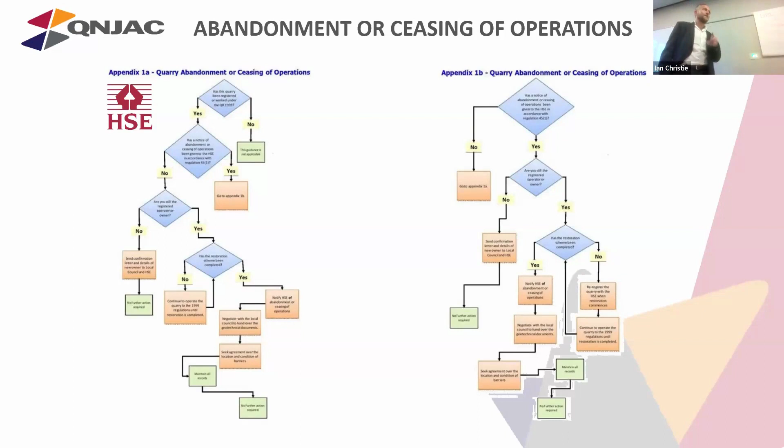So the next one here, blast designs, techniques to improve quarry face stability. What this piece of guidance was trying to do - and there's another piece that comes in later also - was to improve the connection and consultation between blast design and quarry design. This was a joint piece of guidance that came out with the Shot Firing Group, looking at the shot firing rules and how that integrated with the QDP.

It would be quite a natural question for someone to ask you - a geotechnical specialist or someone from the agency - to say, why do you have burden and spacing of X blast design? Just to come back and say well, we've always done it that way isn't the best kind of answer. It would be a case of, well, it's based upon the ground conditions, it's been refined and modified, taking account of the geology and other things like that.

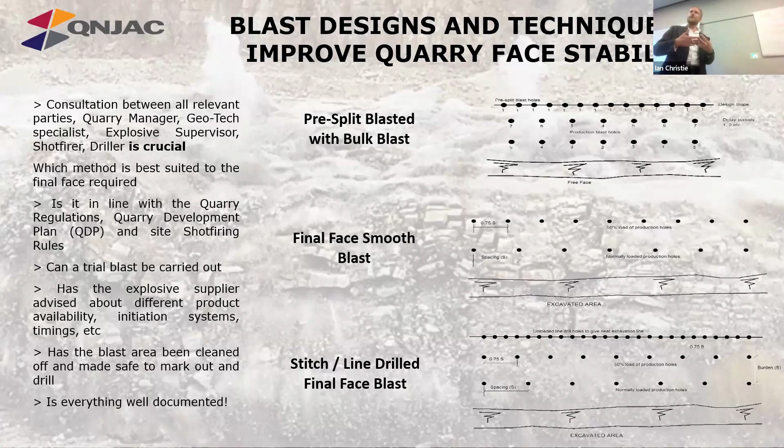If you've got scenarios like that on your sites where your design is saying one thing and the rules are saying something else, and then what's actually happening in practice in the quarry is different, that suggests a disconnect or communication issue. It's those kind of things that a quarries inspector or someone from your own safety team might look at and say, wait a minute, why aren't these things talking to each other? Are people really engaging with this?

But it's quite useful to have a graphical representation of this kind of stuff that you could share with operators in the vehicles. They could even have copies of these kind of things laminated in the vehicle with them, again modified to suit the specific scenario.

Geotechnics on one hand can be made to appear horrendously complex, and some of the analysis, some of the maths behind it, is no secret - but actually on the ground and day to day, this stuff doesn't have to be. So I do quite like these type of diagrams.

So yeah, toolbox talk with a geotechnical theme to it here. Good CPD even if you're not going to necessarily use them on sites - talking through. Does anyone use job cards on their sites? It's a well kind of way of communicating this stuff.

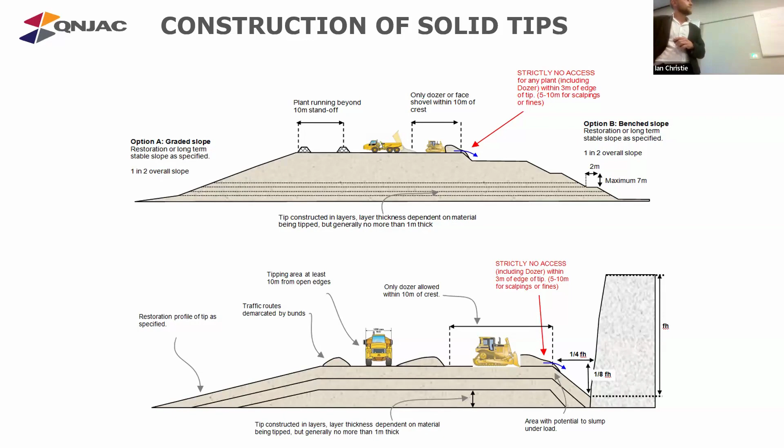Duties of the operator. This is useful, I think, in that if you have a new director, managing director, or operations manager come into a site who may not be familiar with the quarry regulations, you can't presume that people coming in always have that knowledge of the quarry regs. It's a good document - fairly clear, easy to read, but quite a thing to get to grips with.

Part 6 of the quarry regs is quite a chunk of that book. There is some guidance here - I think this could do with a bit of a refresh in terms of the look and feel of it. But there is something you could point that person towards and say, if you want to get familiar with the quarry regs and really understand why we're doing this on the site, have a look at this.

With a copy of the quarry regs in one hand, it will talk you through the duties of an operator - I suppose even who is the operator, who is signed up as the responsible competent person. That helps focus the mind if you're trying to promote certain safety issues or challenges or costs on site related to geotechnics.

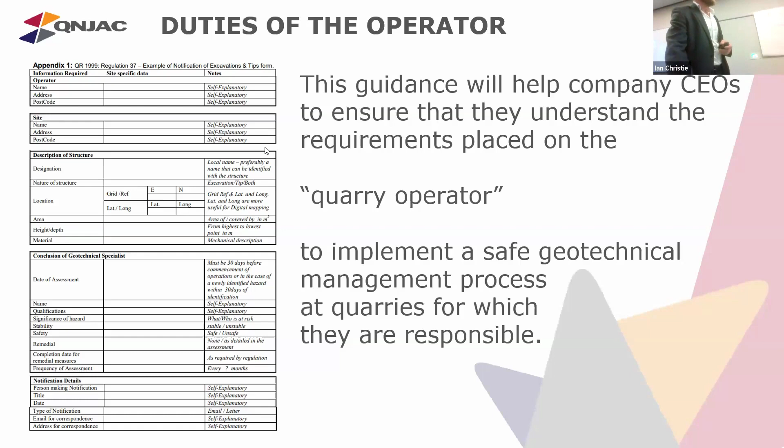Yeah, so this one, another piece on excavation and tip rules. Key document on the site for me. If you're doing anything on a quarry, one of the main things is digging the excavation and forming tips and stockpiles. And when it says tips, that includes stockpiles as well.

The little preamble on the front of this piece of guidance I just copied in here because this would apply to all the guidance that comes from QNJAC. It's been endorsed by QNJAC. Following this guidance is not compulsory. You are free to take other action. Health and safety inspectors seek to secure compliance with the law and may refer to the contents of this information sheet as illustrating good practice.

So yeah, it's to say that you don't have to follow any of this guidance to the letter. That said, excavation and tip rules, you have to have excavation and tip rules. Exactly how you do that, how they look, is up to you.

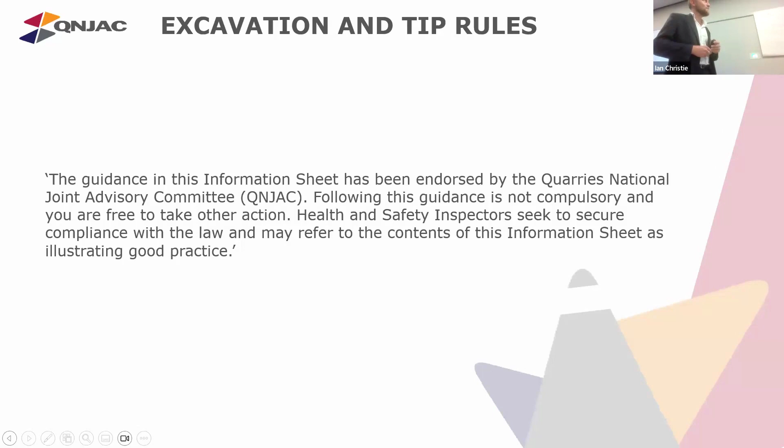So yeah, the guidance has various bits and pieces in it, and then at the back, they try and make this useful, because you can just read loads of guidance, but actually, what are you left with at the end? You might have loads of questions. The appendix here just helps give you some kind of structure that you could follow to create your rules.

Now, stood here coming from one of the big operators, I can say, well, we've got a geotechnical safety standard internally, we've got prescribed documents and forms. That's not going to be the same for everyone. Some companies won't have anything, some will have certain bits and pieces, and even if you have, it's often worth checking that documentation. Is it up to date? Are there any gaps within that?

So yeah, we've got quite a long list of bits and pieces in there. Obviously it'll be tailored to your site and what's going on. And that point about tailoring it is so important when it comes to excavation and tip rules.

I've done it myself years ago, I remember being on a sand and gravel quarry, looking at the excavation and tip rules, seeing referencing to drilling and blasting. You think, goodness, has anyone actually read these rules? And who created them? Is it the managers? Also, it's important to have that kind of ownership of it.

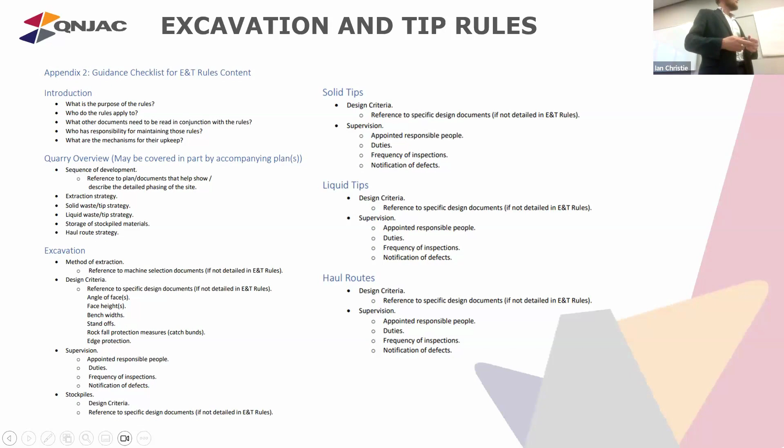So we've done, on a bit of a marathon here, we've done five bits, and again, that's a very light touch. I'd encourage anyone, if you've got an interest, have a look at some of this stuff.

Excellent. So we're going to go on to these next four. Before I do, is there any questions or raise on points in five so far?

Face surveying. This came about, again, in the spirit of trying to tackle issues that arise in the industry. This came about because of a challenge we were having with, and questions we were having around the use of bunds at quarry faces, and I mentioned it earlier on the blasting. You put rock trap bunds up. Could they impede the ability to profile the face or blast? So do you then, one extreme is you just take away rock trap bunds, and you can scan profile the face, as you've got a problem.

But some people were going down that route thinking, well, okay, that means if you're profiling the shots, they're safer. But then you're potentially contravening the quarry regs that you've got these open faces with no rock traps. Then looking at how you demarcate areas that maybe haven't got rock traps so that you can profile the faces or take shots.

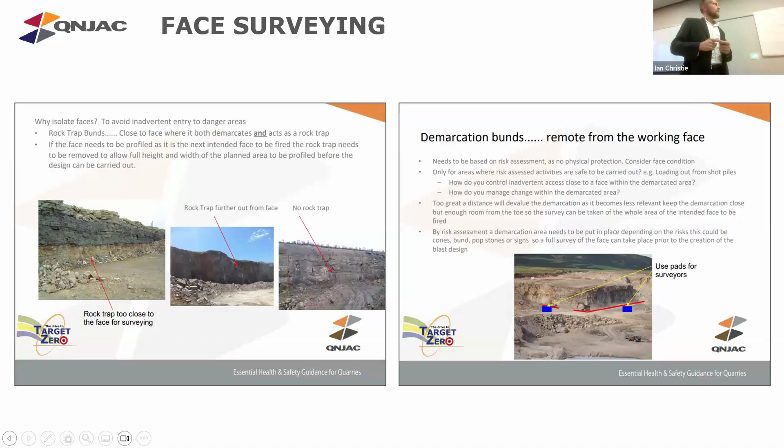To move on to this one - and it's possible to have a favourite piece of guidance, I'd say this is probably one of mine. It's one of the more recent ones, and it's a geotechnical self-audit. It doesn't really look very exciting at all, does it?

But what it is, is a series of questions you can go through. You can print this off, or you can use it - I think it's going to be an interactive PDF, whereby you can answer yes or no and put actions into these. It asks you a series of intentionally leading questions about geotechnical management.

Some operators will have regular audits on their sites by internal or even external people. They will come in and check the condition of paperwork, and is the paperwork up to date, and is that in accord with what's actually happening on the site. But many won't, and if you haven't, then this can be quite useful.

First question in the general section: is there an appointed geotechnical specialist for the quarry? And if someone's saying, well, why do I need one, or what is that, it references the regulation - regulation 33 of the quarry regs. I always recommend a hard copy of the quarry regs printed out.

This could really go some way for someone who's new on your site, or someone who's trying to build up their geotechnical competence. They could go through this and come back with a potentially quite useful action plan to address some of the stuff.

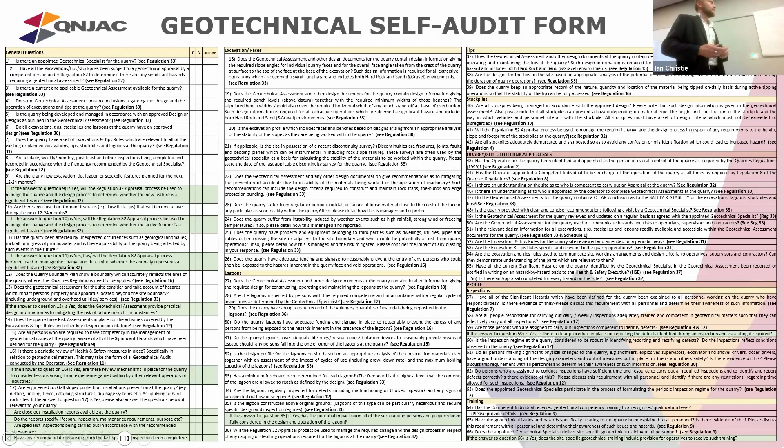Yeah, so there's a lot. Every one of these you look at, you think, yeah, there's a discussion there. So I'd encourage you to have a look at it. It's something I keep mentioning the HSE on, but I am aware, I think that they're quite interested in this, and inspectors may say to you, are you aware of the self-audit? Have you had a go at it, or do you review your health and safety measures in other ways? This is one nice way of showing we've done it with regard to geotechnics.

So the next piece is guidance on selecting geotechnical specialists. It's the duty of the operator to appoint a geotechnical specialist. And you can see their duties beyond that as well: ensure that significant findings and conclusions are recorded by the specialist and that the geotechnical specialist signs and dates the document, ensure that any information available which may be relevant for the purposes of a geotechnical assessment is made available, and ensure that any remedial works identified during the geotechnical assessment are completed by the date specified.

That is a very important point at the end. If you pay someone to come in and do a geotechnical assessment report for you, it's worth having very good conversations with them while they're on site, while they're drafting those reports, to really understand what actions they're going to recommend and the timeframes to do them in. Yeah, if you've got a geotechnical assessment on site telling you there are certain remedial actions to do and they haven't been done, that puts you in a difficult spot.

So yeah, the operator needs to appoint someone there. This checklist was put together in terms of what would be a requirement for competency around geotechnical specialists. And funny enough, this is a conversation and discussion we were having, or started to have, at a recent event, talking to geologists and geotechnical specialists about some of this stuff. As an operator appointing someone, you need to be able to assure yourself that the person giving you the advice is competent. That's hard, it's a hard thing to do actually. But I'd advise anyone that has a geotechnical specialist or is thinking of appointing one, always ask for competency statements and details from them.

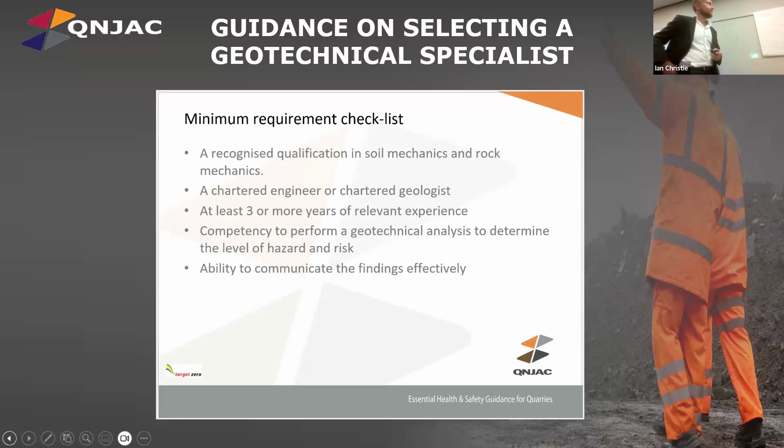This one's guidance to managing change to excavations and tips. I like this one because it's got these flow charts, and also because managing change is probably one of the biggest challenges we have with quarries and geotechnics. Typically, particularly with hardstone sites, we kind of know what we've got to deal with, but things change from the inception of the quarry through their very long life.

The ability to appraise that change and understand courses of action from there is quite important, so the flowchart helps you with that. There's actually here, changes to relevant site personnel, including contractors - sometimes that can get overlooked, but that's a pretty significant change - a new quarry manager, possibly even a new explosive supervisor or shot firer. What are we going to do about that change? Are we going to assess their competency against the job role, develop a plan for them, authorize them for tasks where competent, review the rules in light of any new controls, or share and communicate them?

Question 2: impact of any recent industry safety incidents regarding quarry development. That's another thing - as things change, if things happened in the industry, have there been any major incidents? And it runs you down that list.

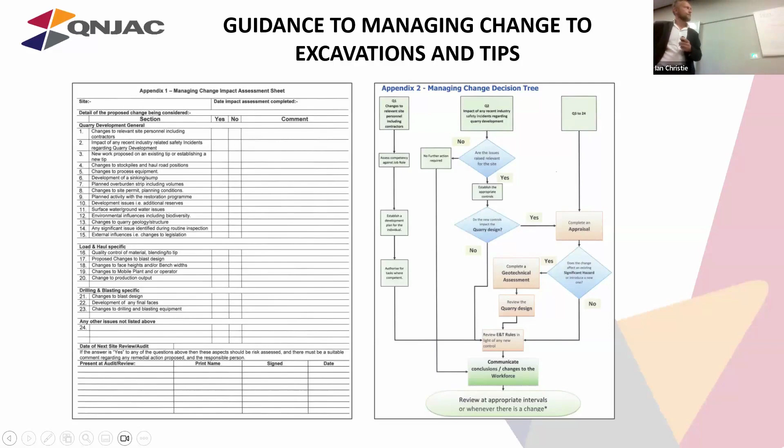Excellent. So, any questions? Normally when we go through these talks we just pick on one of these, so the idea that we're going to rattle through everything in the theory is quite... information and engagement. So we touched on this earlier when we looked at engaging with the shot firers and blast design, and this piece actually really focuses in on the importance of that.

It was done in conjunction with the drill and blast group, so that's the other piece, and it references the quarry regs with regard to blast spec reg 25.

In this document there's a toolbox talk and some slides, and this was an example here. I don't know, it doesn't really matter where the site was, but we've got a situation here where you had a restored landform - you can see it there - and a shot was taken in the quarry just the other side, and it caused that landform to fail across a public access. Quite a significant situation - no one was hurt, but it would have been obviously a catastrophic kind of failure.

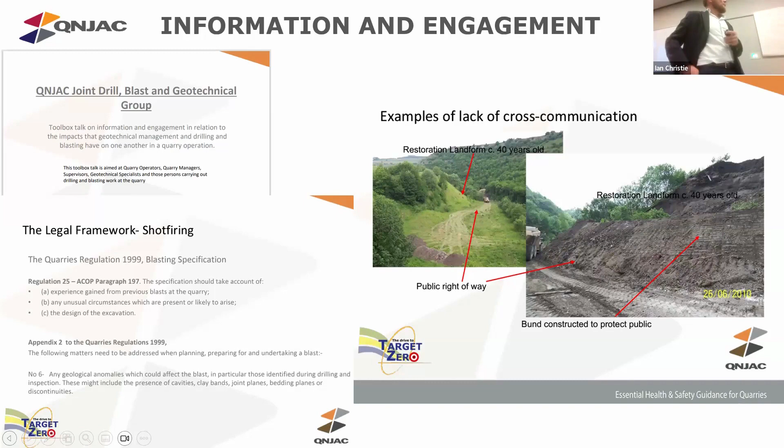Inspection of rock faces toolbox talk. This is as it says, a toolbox talk. It's got a few slides in, low on detail really, just lots of pictures, quite shocking, designed to have some shocking pictures that you can share and discuss with people.

People will say, oh, I know it never happened on my site. It's always easier to identify issues on someone else's site, but you can see things here. Quite often when a geotechnical specialist or anyone new to the site comes into a quarry, they'll look at things from different angles. They'll see things you may be blinded to by familiarity.

And quite often people say, oh, that would never happen on my site. Well, it does. These geotechnical events and rock falls, either just spalling in general or structurally controlled rockfall, do happen, and they still happen. Sometimes things like this occur, and someone well-meaning will come through every morning, scrape it up off the road, chuck it on the side, and no one hears anything of it. Sometimes those small events can be precursors to much larger failures and issues.

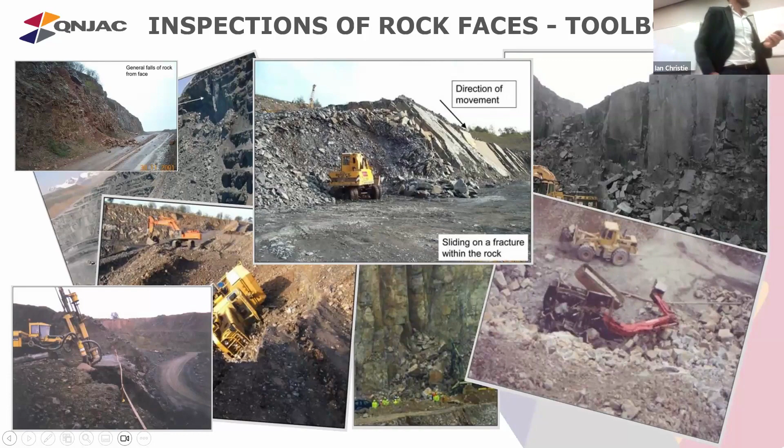Management of stockpiles - we looked at one earlier which had some job cards in, related to forming tips, and stockpiles are pretty much the same as far as regs are concerned. It's just some guidance here. This looks pretty extreme, but I have to say I've seen quite a bit of this on certain sites, depending on the material.

We shouldn't underestimate stockpiles, because there have been some nasty instances in the past, particularly because you've got an area on site where the public may be coming in with tractors and trailers. Some people might be handballing stuff into the backs of vehicles as well, a lot of moving equipment. One minute you could be building up your stockpiles, and next you might be trying to destock in between.

Does anyone have multi-level stockpiles on their site?

These can either develop or they can develop as just one very big stockpile, and then geotechnical specialists might come in and say, oh, you should really split that and turn it into something else. How do you do that? How is it practical? Can you do that?

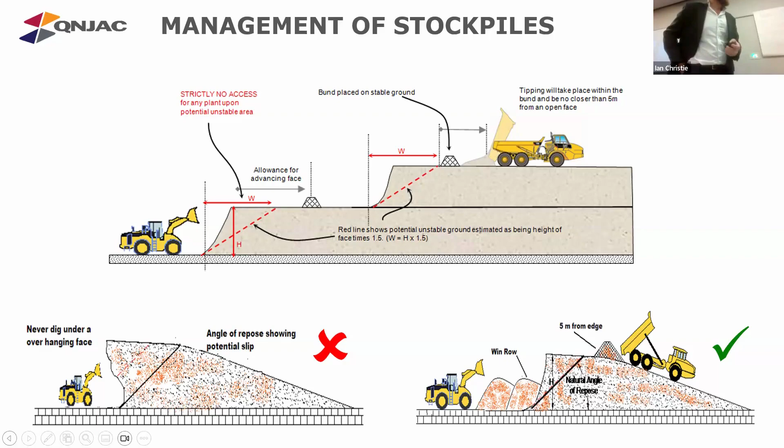This toolbox talk on overburden stripping came out because it was recognised that in a number of cases, a lot of this work was being done in quite difficult situations. It could be complex topographies, difficult overburden and geology, and it may not even be done by the quarry itself. There might be load and haul contractors involved, and the communication around that can be challenging and difficult sometimes. So some guidance could be adapted to provide a more nuanced safety induction for them or anyone working on these type of projects.

I just use the term project there - these can be quite significant operations in their own right, not to be underestimated.

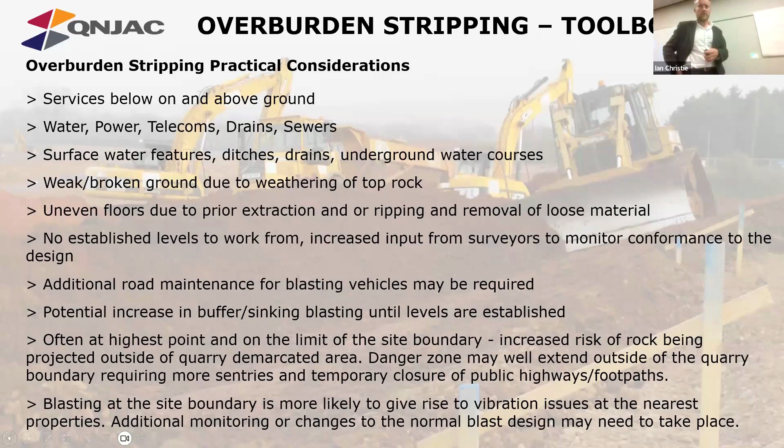Lots of points here just to get thoughts going. Again, one slide from memory within the toolbox talk, about bringing communication into the process.

So it's talking about things that might get neglected in these type of operations. Do you need to appoint a blasting contractor for this? What about an estates manager or someone who understands the permitting requirements for the site, blast restrictions, vibration limits, working hours and things like that.

The shot firing rules need to be amended to cover overburden blasting. Some of this can get quite difficult, particularly if you've got designs being done by one person and then you're giving those to a shot firer and asking them to do some potentially almost impossible developments in ground that's uneven or very fragmented or weathered.

What I'd like to think is that in an ideal scenario, there's a project team, project lead, you have all these people come together, you have regular meetings, pre-start discussions, there's a tender document that has all these designs in it, it's being outsourced. But how often does that scenario happen?

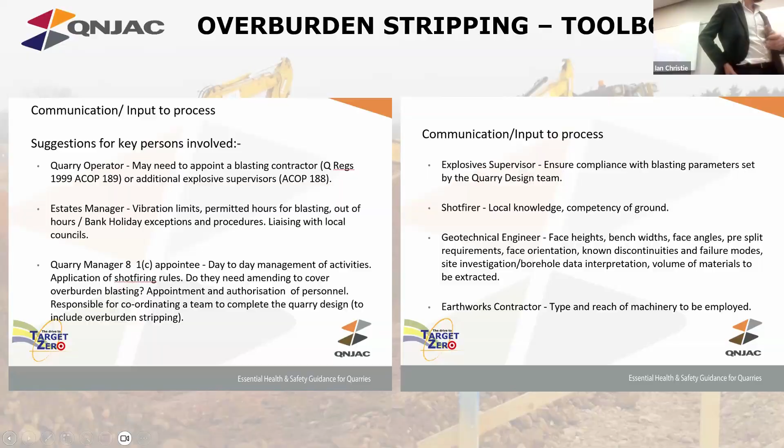So I'll do these last aspects here. Before I do, any thoughts on that? Is overburden stripping a big part of the roles here?

It's a lot. I know, speaking for Tom, we do a lot of that every year, and those relationships with the people - whether it's their own people or contractors - is so important.

Quarry Regs Regulation 32 appraisals - we've touched on this before in terms of managing change. This really delves into that Reg 32 process in a bit more detail, and it gives you some guidance on the geometry of features here that constitute significant hazards in terms of the ACOP, the approved code of practice, and quarry regulation.

It might be that you go through and tick these boxes and think, right, it forms the definition, it meets the criteria of a significant hazard. You speak to your geotechnical specialist, they might say, actually yes, but there might be some distinctions to make. So is a 1.5 meter high bund that extends for 200 meters around your quarry a significant hazard by virtue of its area? Is it a tip? Would it be? I don't know - be pragmatic about that.

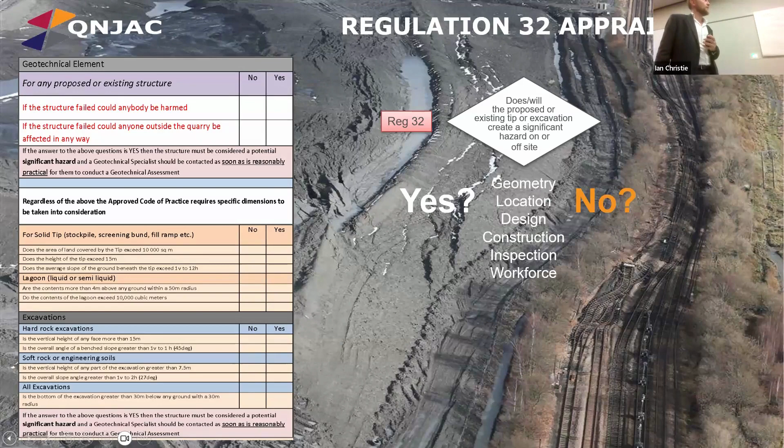Quarry design, right? This is hard to read, but it's talking about the importance, when we're producing quarry designs, of making sure you firstly identify all relevant personnel involved in the design, identify the individual responsible for the design, identify and gather all information relative to support the design, and identify all the relevant design parameters. I'm saying the word design a lot here, and the word design is in the quarry regs over 60 times, so that's why it's appearing quite a bit.

Identify all geotechnical elements for appraisal. Non-geotechnical elements require a generic assessment. Appraise to identify significant hazards, which we talked about earlier. So what this is trying to do is put together that whole process around creating your quarry design. Some companies will have ways and means of doing that - maybe some people have specific roles around this.

Does anyone who's in a quarry have access to or see their quarry design? It might have a final quarry design, which shows the finished article. You might also have designs for the active phase. Design can take various forms as well - rules for some simple features, or in other cases it might be a full-blown schedule and assessment report, which has plans, maps, stability analysis, and everything else.

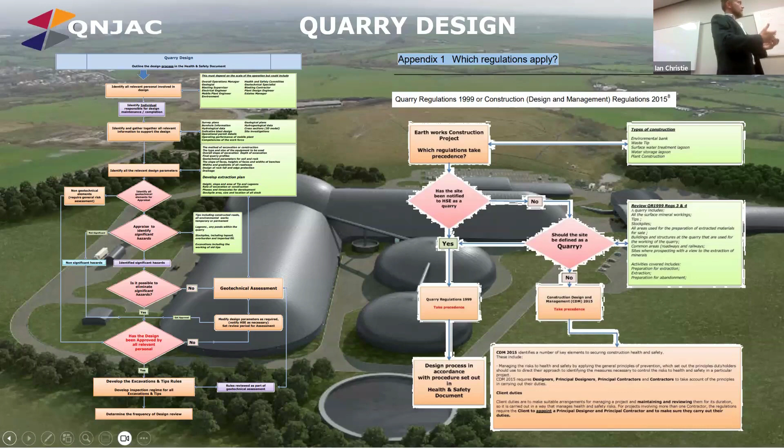I have to say, I think we're fortunate with our HSE quarry inspectors in that they are very pragmatic, but they're quite straightforward. They could stand at the site and say, well, it says quarry on the site, it's got your name on here, your company name - so is this a quarry or not? It's quite useful to be able to refer to some of this guidance sometimes, particularly when dealing with your operators and your management, and to ask these kinds of questions and make those types of challenges.

Quarry lagoon inspections. It's noted that lagoons represent quite a distinct hazard and some quite unique features around them. So there's some guidance on that. We're probably looking at updating some of this information, actually.

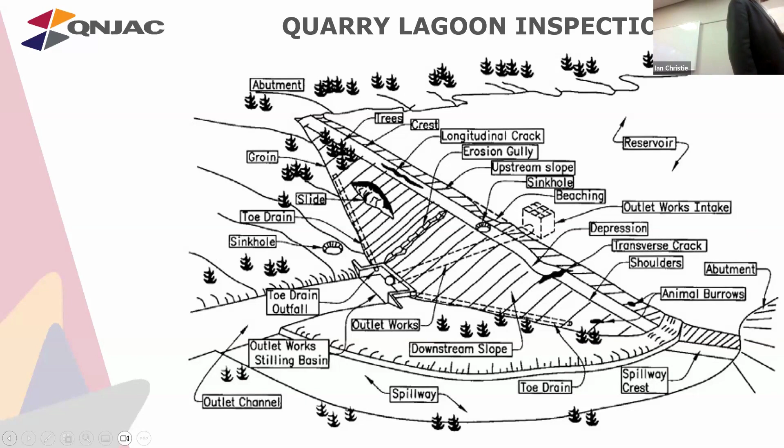There's a diagram there that gave some terms that could be used around parts of a lagoon, and here are some features that you can see, some issues. We always like to take pictures of things that are going wrong - looks more interesting - holes in the ground, sand kind of boiling and bubbling up. This is still bubbling up here, which could be a result of something like this happening underneath the retaining bund.

Big challenge, lagoons, I think, not to be underestimated. We have lagoons on all our sites. I'd say on some of the sand and gravel sites as well, we can almost ignore this at our peril. We sometimes think the sand and gravel is a bit easier, but this is quite challenging. Has anyone had any good, bad, and different experiences with lagoons?

I think the problem a lot in Scotland is wave erosion. Yeah, the waves get high energy, and once the waves start heading from the west, all hitting the same point over the years, it does create significant erosion.

It's a good point - often there's limited access because lagoons are built in the quarry. Once you start to erode, you can't get access back again. So it's often a problem trying to remediate the erosion from waves, and it causes much more work than you'd expect just to get access to actually fix the problem. Good point, isn't it?

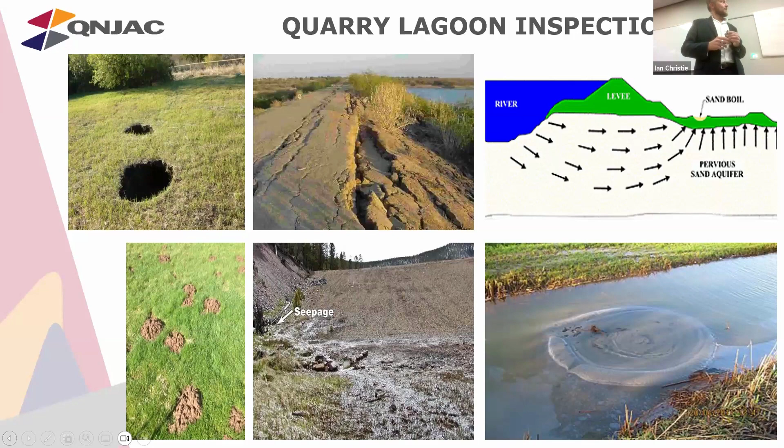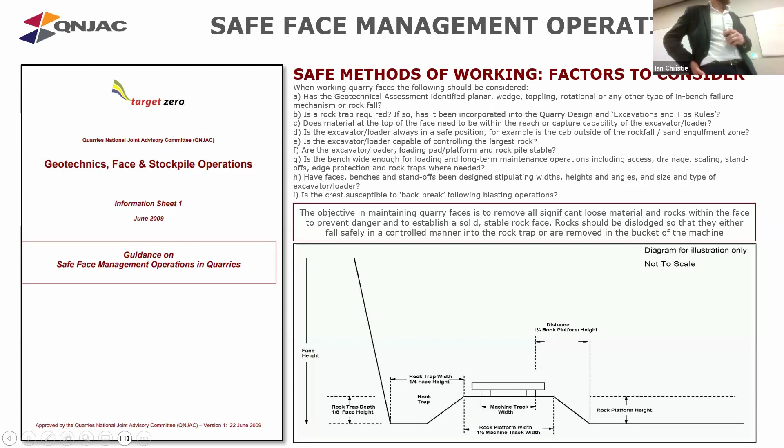Future publications - as I've mentioned throughout this, we're going to be reviewing some of the guidance we've been through, putting it in the new QNJAC colours, logo and format, so it's a bit more accessible to people. We're also interlinking it with other guidance where we can, because there's a little bit of crossover and repetition, and you'll pick that up as I go through some of the new pieces coming out in the new year.

Geotechnical assessments - fundamentals of it, what you should have in a geotechnical assessment, and a geotechnical emergency checklist. This is designed to be something that could potentially go on the wall that you could look at and say, okay, you have a lagoon failure, tip failure, what do you do? In many cases with safety issues on your site, like a fire or flood, you may already have that. Why don't we have that necessarily for geotechnical matters?

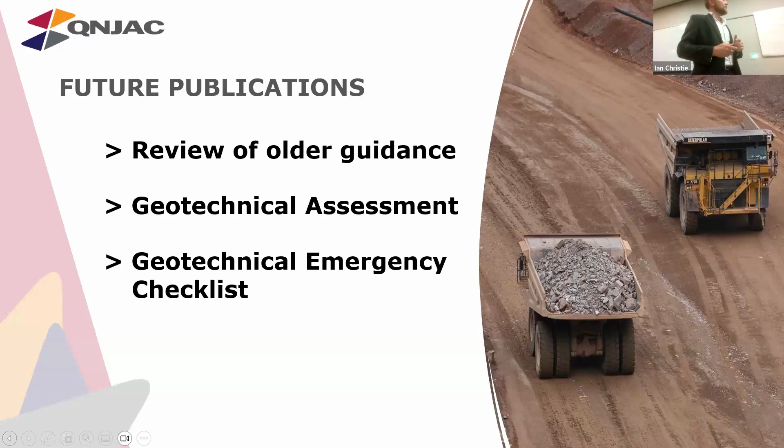So there'll be some more, I'm sure - there's a few other pieces in the offing. Get involved, and I mean really getting involved - if you want to go on the website, anyone can express an interest in getting involved with the subgroups, any of those I've mentioned.

If there's any guidance they wanted, or anything they wanted to see coming out of QNJAC, we could make happen. Obviously, I appreciate you've gone through loads of guidance, you probably think, goodness, gone through anything you could ever have thought of, but I'm sure there's other stuff that might crop up that doesn't come easily to you.

Well, thank you all - there was so much in that presentation. If you want any more information, go on the QNJAC website and have a look at it. There's just too much to take in tonight. But do you have any questions from here, and from online?